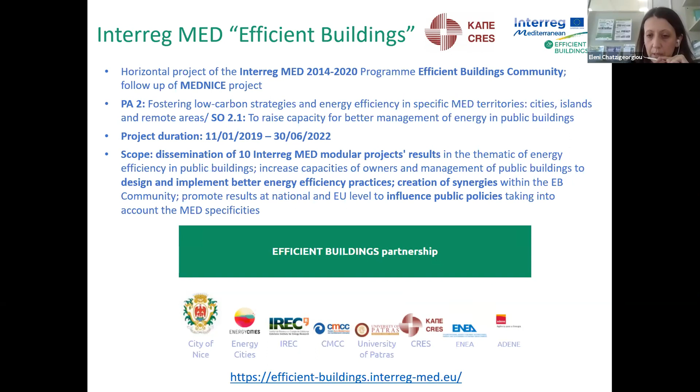This is the project website and the partnership. The partners participating are the City of Nice, Energy Cities, IREC, CMCC, the University of Patras from Greece, CRES, and ADENE. All this has as a background the wider EU objectives and requirements, which are becoming more demanding in terms of buildings renovation.

The EU Green Deal targets a renovation wave, which puts public buildings at the front of this initiative. They have a key role model to play for the public and the wider industry. The renovation wave builds on existing EU directive provisions, such as the EPBD and the EED, with the requirements of these directives in terms of increasing the energy efficiency of public buildings.

So the scope of the Efficient Buildings project is to accelerate the implementation of all these EU strategic targets.

So this is just a short introduction, and then I will move on to the first presentation of today's workshop, which is to do with a general presentation of the Impulse project. Sorry, let me just share the next presentation.

So the title of this presentation is Integrated Management Support System, a methodology for planning energy efficiency interventions in public buildings. I will give you a more general description of the project, and then my colleague Katerina will follow in the next presentation with a more detailed look at the tools that the project developed.

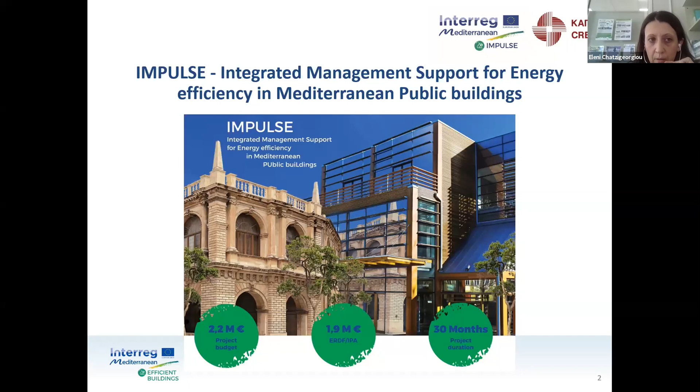The project drivers - I will not go into detail with the EU demanding requirements already mentioned, but just to emphasize that the main driver for the project was to address the requirement of an annual renovation rate of 3% of buildings with a floor area over 250 square meters, which are occupied and owned by central government. So there is a requirement for these buildings to be renovated each year.

But also the directive asks member states to encourage public bodies, including at regional and local level, to adopt an energy efficiency plan, either freestanding or as part of a wider environmental plan, containing specific energy saving objectives and actions for their public buildings, following the exemplary role of central government buildings.

So the overall target of the Impulse project, amongst other things, was to focus on these requirements and try to provide tools that can support public authorities at regional and local level to address these.

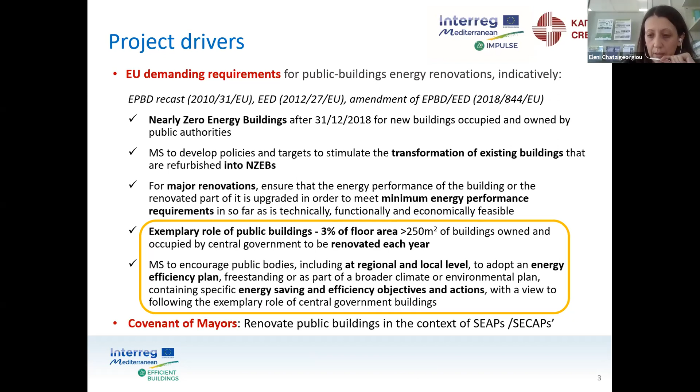Another driver, of course, was the Covenant of Mayors initiative, which is a voluntary initiative but a very large one, including thousands of municipalities from Europe and beyond, as part of which local authorities have to prepare sustainable energy action plans, SEAPs or SECAPs as they are now called, which include a section on public buildings.

And also one of the other drivers was the slow rate of public buildings energy renovation currently at local level, mainly due to a number of reasons.

The absence of technical energy data on the municipal building stock, the lack of specific methodologies to organize the information, the absence of reliable systems to map buildings' energy performance and to plan cost-effective technical and financial plans, the limited resources of public authorities for these actions, and the lack of funding to implement deep renovations means public authorities have to carefully plan gradual renovations of some buildings every year. So they need a decision support tool to help them select which buildings are priority for renovation or more cost-effective to renovate.

So the project involved 10 partners from 6 Mediterranean countries: Greece, Spain, France, Italy, Croatia, and Bosnia and Herzegovina, and 6 associated partners. CRES, as I said, was the lead partner of the project, and the project ended in July 2019. It was in the category pilot testing project of the MED modular projects, specific objective 2.1.

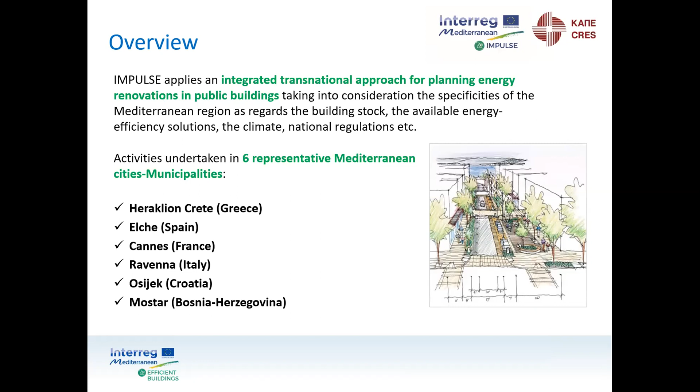Overall, Impulse applies an integrated transnational approach for planning energy renovations in public buildings, taking into account the specificities of the Mediterranean region as regards the building stock, the available energy efficiency solutions, the climate, national regulations, etc.

Actions took place in 6 representative Mediterranean cities, respective municipalities: Heraklion in Crete from Greece, the municipality of Elche from Spain, the city of Cannes in France, the municipality of Ravenna in Italy, the city of Osijek in Croatia, and the city of Mostar from Bosnia and Herzegovina.

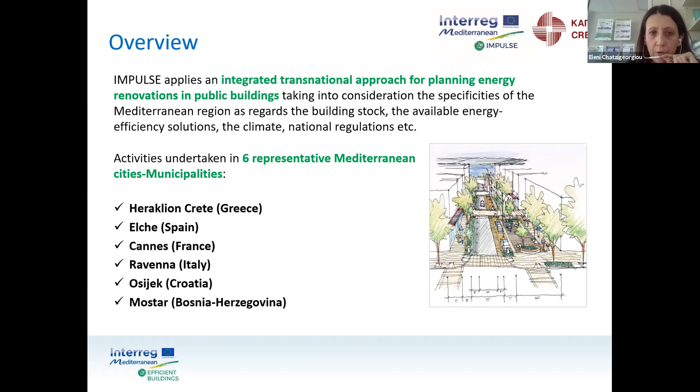The overall objective was to develop a system that can help public authorities plan reliable and affordable energy renovation projects for public buildings. There were some more specific objectives: to develop systems for the classification of public buildings in each pilot city into typologies, the assessment of renovation scenarios, and cost-optimal intervention, to develop renovation roadmaps and financial plans for gradual energy transition.

To develop a GIS-based information system with a mapping of the results for each typology in each pilot city, to use the Impulse tools to develop the relevant sections on public buildings within the SEAPs or SECAPs for the Covenant of Mayors, to undertake pilot small-scale renovation projects in the pilot cities, and most importantly, for these results to be transferred and replicated to other public authorities in the Med area.

This was done both during the duration of the project, with transferring and portability campaigns for this, but is also now the scope of the current Efficient Buildings project, and part of the reason for today's workshop. And ultimately, the uptake of the results in public policies at local and national level.

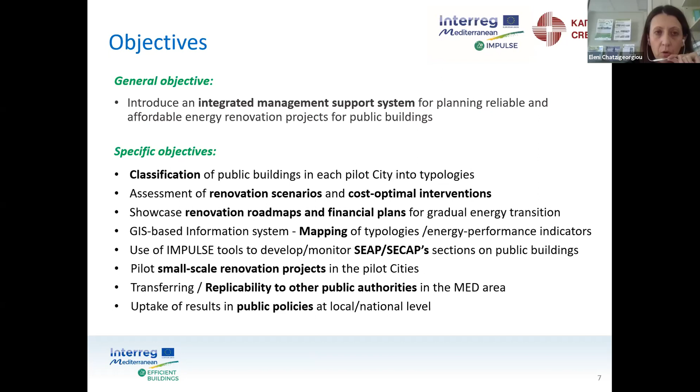So to show in a chart the overall Impulse approach, the first step towards planning energy renovations for public buildings includes a classification of the building stock using classification protocols. Then undertake energy analysis and simulation of the building typologies, again using various tools. And from this analysis result key performance indicators for the existing state and for various renovation scenarios.

At the intermediate stage, all of these results from the analysis were integrated into an Impulse GIS system for each pilot city. And at the final stage, some small-scale pilot renovation projects took place in the 6 territories.

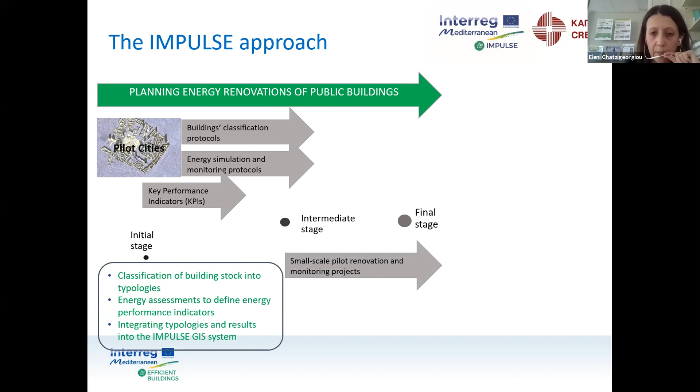In parallel, throughout the project, there were transferring and communication actions: videos that were developed, which are available on the project website, national networking forums of relevant stakeholders, technical and policy meetings, training seminars, and portability campaigns. In the next presentation that will follow, you will hear more about the various steps and the tools that this chart includes.

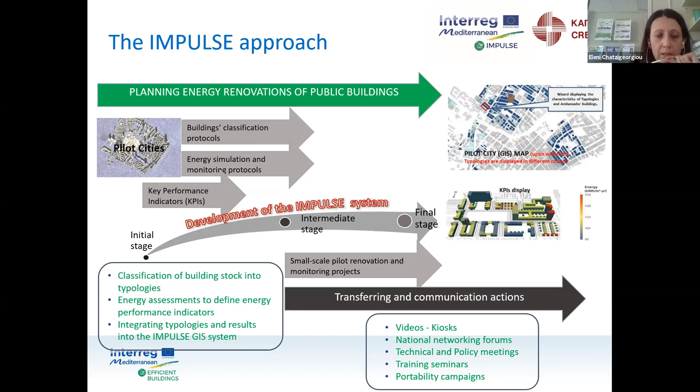So just to summarize the results we got from the project: overall, there were 6 libraries developed of public building typologies in the participating pilot cities, 1 integrated management support system integrated within a GIS map in each pilot city, including packages of cost-effective energy efficiency solutions replicable to other Med territories, 6 small-scale renovation projects in the participating cities, and 14 letters of intent from public authorities at national, regional, and local level to further exploit the project outcomes.

And also, we managed to achieve 50 completed SEAPs sections on public buildings in Med municipalities. Just to say some more things about the small-scale renovation projects, these were selected indicatively as 1 building in each pilot city.

There were buildings selected which were of high value for the citizens and the end users, and the selection was based on the results of the energy simulation analysis in terms of buildings that presented high energy saving potential with the least cost. So as the budget for implementing these actual renovations was relatively limited, we wanted these projects to have the most cost optimal result, and also a demonstrative character for the public and the users.

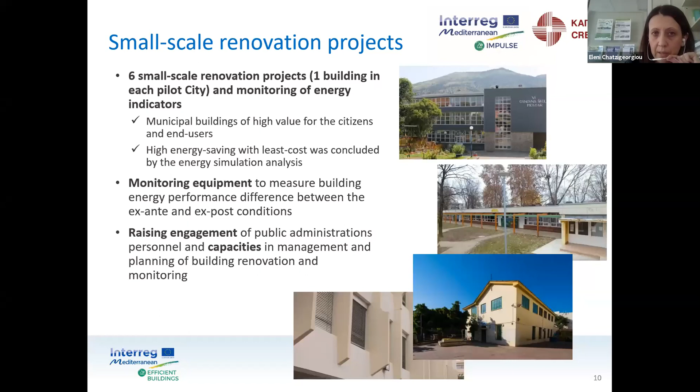Focus group meetings, national seminars took place, with the participation of political actors from each partner country, and the Covenant of Mayors involved stakeholders such as Covenant of Mayors coordinators in each territory, and also the respective mayors of the cities, with a view to eventually uptake the results of this project into political level for forming energy policies in the future at local level.

And as I mentioned, as a result of the project in the portability campaigns, 15 to 20 additional municipalities in each partner country were involved and experimented with the project outputs. So they used them to complete the relevant section of their SEAPs concerning public buildings.

So CRES, as a partner of this project of the Efficient Buildings Community, and with our role as a national energy agency promoting the energy efficiency of buildings, we invite all public authorities at national, MED, or EU level to exploit these tools that were developed by Impulse, which we hope could support you towards gradual energy renovation of the public building stock.

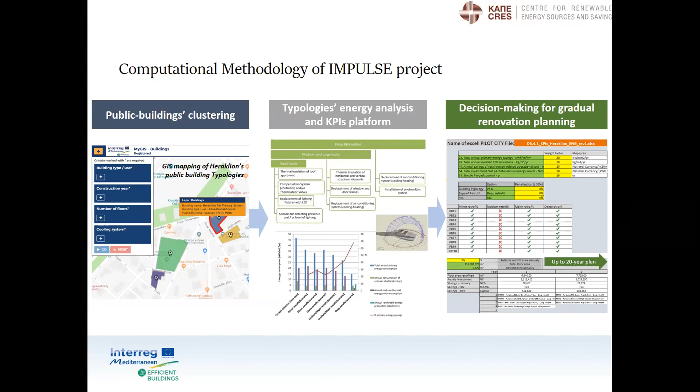So, regarding the first step of our methodology, for the 6 pilot cities, we collected all the necessary information for all the buildings of the public building stock. And we record all these data to an XLS file.

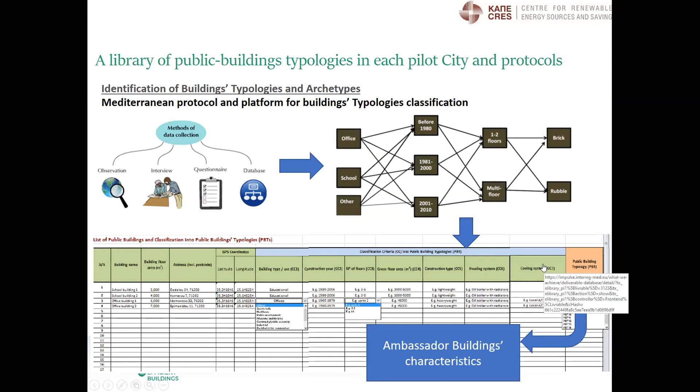As you can see in this slide, we had a lot of data regarding the building type, the construction year, the number of floors, the floor area, the construction type, as well as the heating and the cooling system. And in accordance with these criteria, we tried to categorize the buildings into typologies.

We have also available information concerning the energy performance certificate. We had building drawings, information concerning the construction elements and the building systems, the annual final energy consumption from solid fuels and electricity, and the total annual primary energy consumption. So the first step was to record all the available information concerning the building stock.

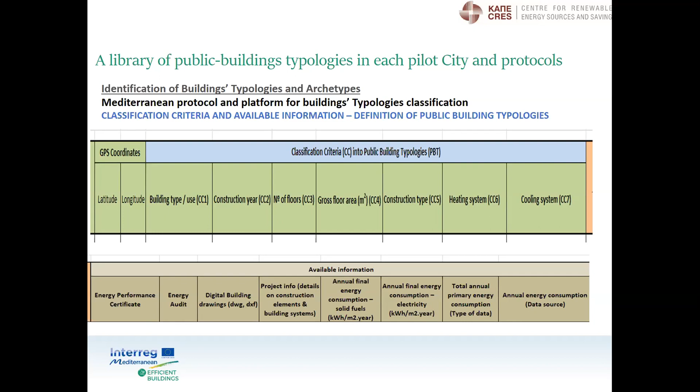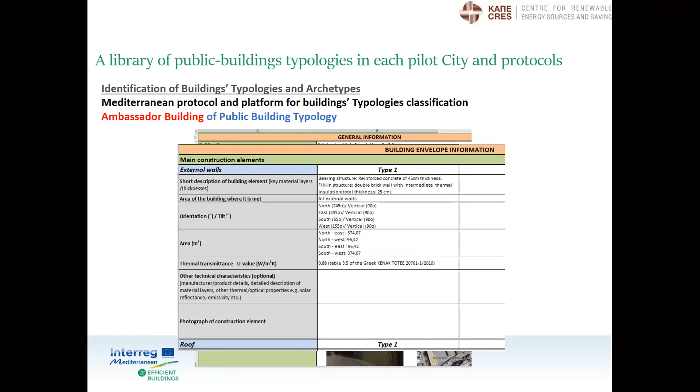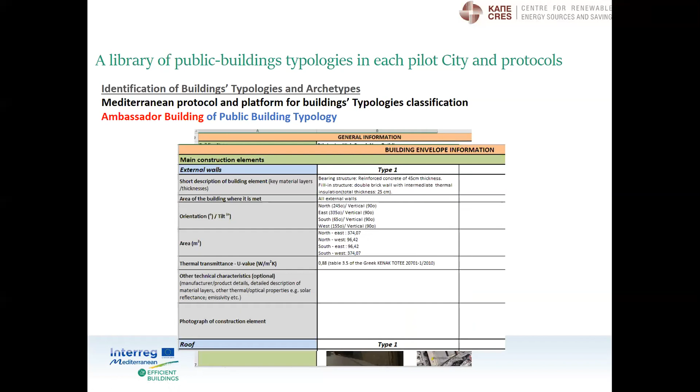And then for each one of the building typologies, we chose an ambassador building, a characteristic building from each typology. And for this ambassador building of public building typology, we record some general information concerning the type of building, the construction year, the number of floors, the number of occupants, some photographs, and then some data regarding building envelope, the orientation, the area of facades, the U values, and finally, some information concerning the building systems, the heating system and the cooling system. And these data were for all the ambassador buildings and for the 6 pilot cities.

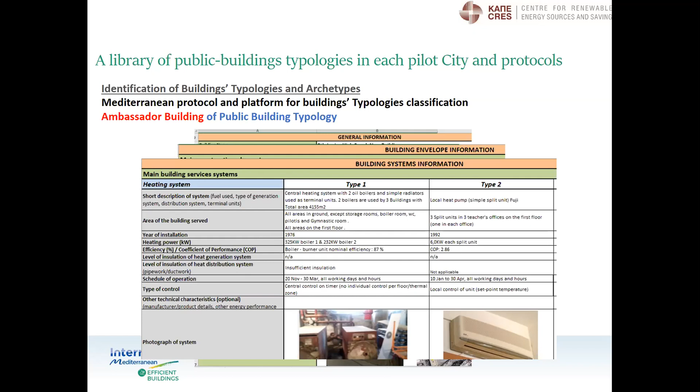The second step has to do with the energy analysis for ambassador buildings with energy simulations. And we decided to perform simulations for minor retrofit scenarios, medium retrofit, major retrofit, and deep renovation. Minor retrofit scenario means that we have interventions up to 35,000 euros and a reduction of energy performance indicators higher than 15%.

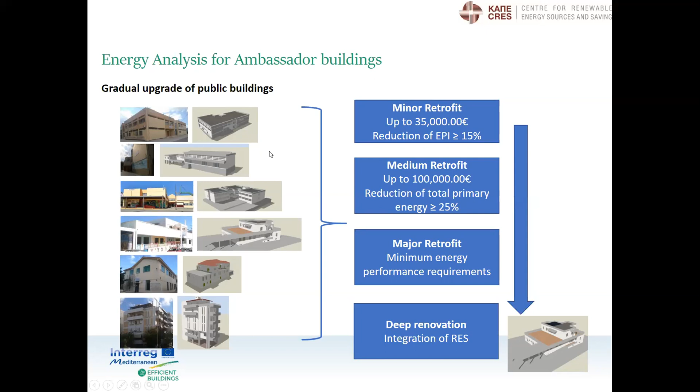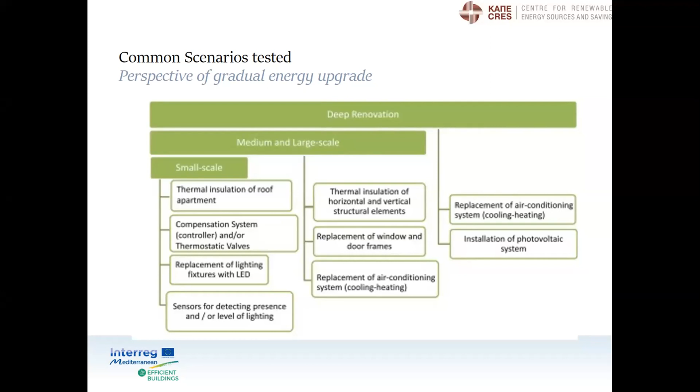In medium and large-scale scenarios, we have thermal insulation of horizontal and vertical structural elements, replacement of windows and door frames, and replacement of the air conditioning system. And finally, for deep renovation scenarios, we additionally have the installation of a photovoltaic system. So you can see in this slide that the scenarios have a perspective of gradual energy upgrade from one scenario to another.

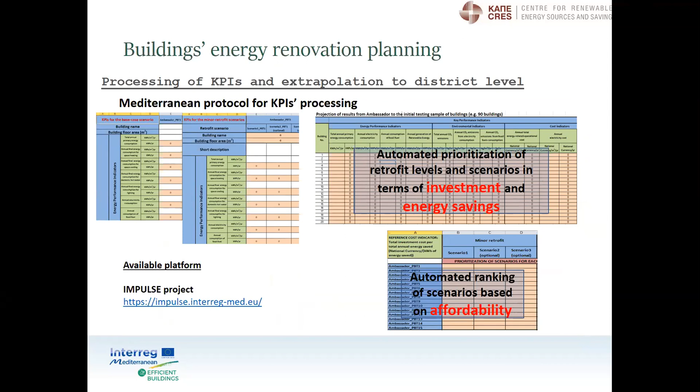In this second step of our methodology, we have the possibility to prioritize the retrofit levels and scenarios in terms of investment and energy savings.

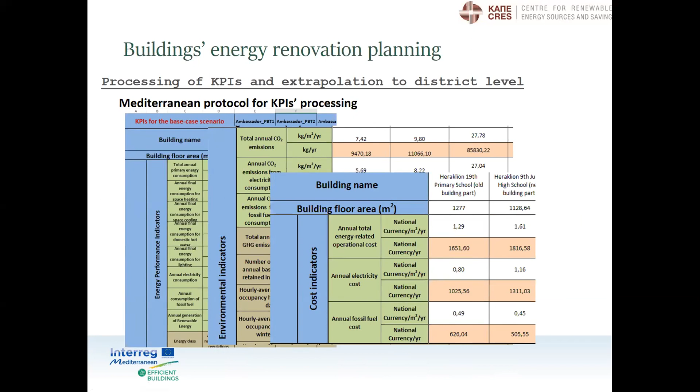For each ambassador building, we calculated the energy performance indicators like the total annual primary energy consumption, environmental indicators like the total annual CO2 emissions, and cost indicators such as the annual total energy-related operational cost and the annual electricity cost. We had this data for all ambassador buildings of each building category.

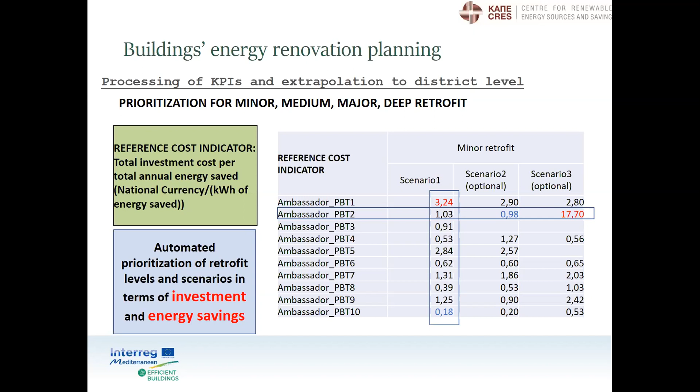We can also compare the values between ambassador buildings, so we will choose a building where the value of the reference cost indicator is quite low. For example, ambassador building 10 has the lowest reference cost indicator. This way, we have a prioritization of retrofit levels, and at the same time a prioritization of buildings in terms of investment and energy savings.

Another important thing is that we can have a projection for all buildings of our stock. That means that after the calculations for the ambassador buildings, we can project the results for all the buildings and have energy, environmental, and cost performance indicators for the whole building stock, for base case scenarios but also for energy renovation interventions.

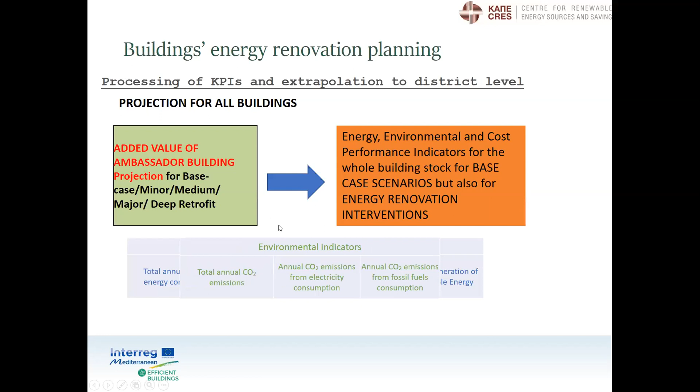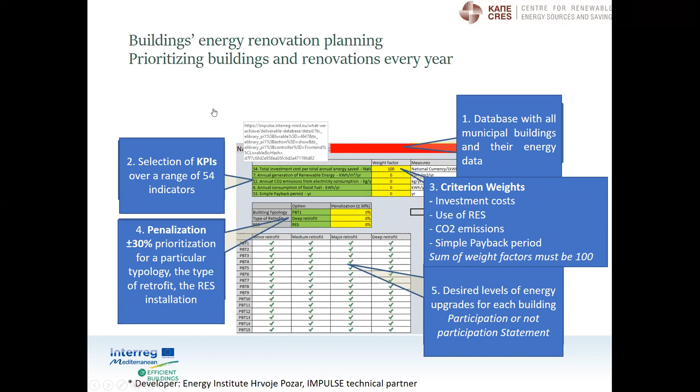From this tool, we have the desired levels of energy upgrades for each building. So we can have an energy renovation plan for the whole building stock of the pilot city.

The second step has to do with the energy analysis, using dynamic energy simulation tools, but this is not necessary. You can also use simplified tools, or use the data for energy from the energy certificates. So we can have an analysis of existing conditions and energy renovation scenarios.

With this second step, we have the opportunity to prioritize the typologies, prioritize the energy renovation scenarios, and estimate the total investment cost and total energy saving for renovating the entire building stock.

Finally, we have the third step, in which we can develop a long-term energy renovation plan of the public building stock based on selection parameters for the buildings to renovate each year.

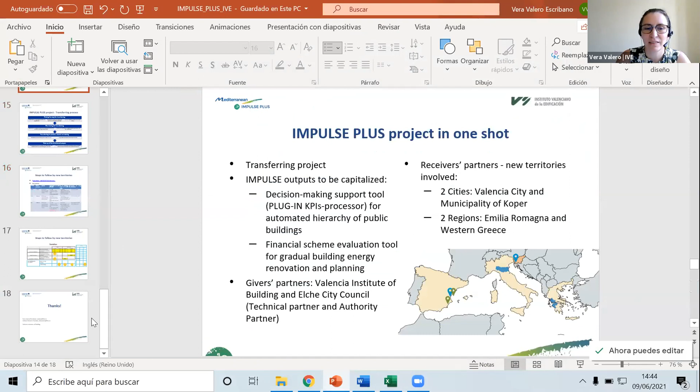We worked together with Elche municipality in Spain doing the Impulse project to develop the tools and the methodology that has been explained so far. Now we are leading Impulse Plus project, a capitalization project on some of the Impulse results and tools, that started in March. I'm going to start by telling you about our experience in Spain, the experience we followed with the Elche municipality.

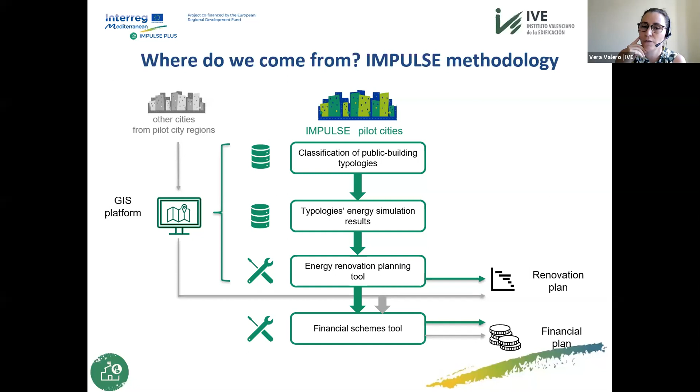And I'm going to briefly present the results of the Elche city. In the first step, when we performed the classification of the public building stock into typologies, we started from an initial sample of 85 public buildings. In the case of Elche, the selected criteria for the classification was the building use, the construction year, the number of floors, and the surface. Once we performed the classification into typologies, only 71 public buildings were classified into 12 typologies.

This is because 14 buildings were excluded from the classification because they were very singular buildings that we considered not replicable. Some were so singular in terms of the construction systems, or were the only one representative of their typology, that it made no sense to consider them into a typology. So when we performed the classification of Elche public buildings, we got 12 typologies.

7 of these typologies were for educational buildings, 2 for sociocultural centers, 1 typology represented office buildings, and 2 typologies represented sports centers. In terms of the number of buildings included in these typologies, 57 buildings were educational buildings, so 80% of the public building stock were educational buildings. And for example, there were only 2 office buildings included in one typology.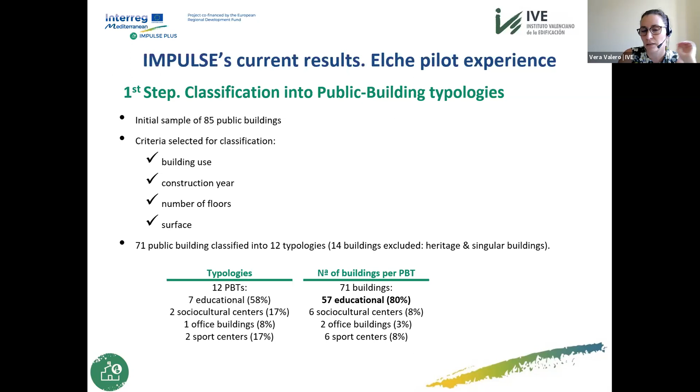This is because in the case of Elche, they have many office buildings that were not included - this is mainly because the Impulse methodology applies at building scale. We can't evaluate or include in this assessment spaces inside buildings. So in this case, many of Elche's offices were included in buildings on the ground or first floor, but they were not complete office buildings.

Regarding the second step, when we were speaking about the energy efficient measures that we get from the energy simulation results for the minor retrofit, mainly the energy efficient measures, we were speaking about the replacing of existing lighting by LEDs and the installation of solar collectors for domestic hot water. You can see there in the slide more or less the annual savings of primary energy we get and the simple payback periods.

In the case, for example, when we are speaking about minor retrofit levels and the installation of solar collectors, the simple payback period increases or reaches 20 years. This is because mainly we were referring to buildings with very low consumption of domestic hot water.

In the case of medium and major retrofit, we have that in half of the cases, the scenarios were common. I mean that when we were trying to reach the objectives established for a medium retrofit scenario, we were reaching the major retrofitting scenarios objectives. It was difficult to establish these 2 differentiated levels.

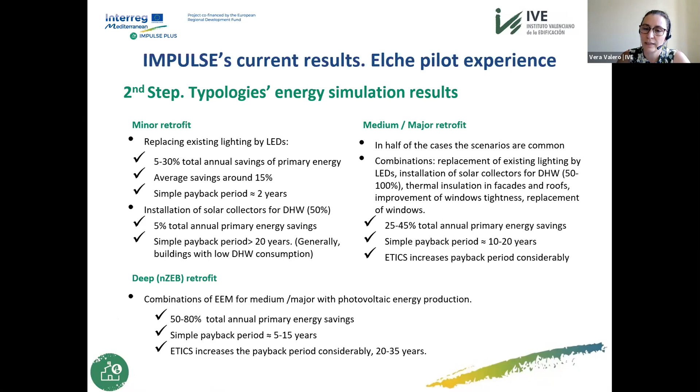And when we were going for deep retrofitting scenarios, the energy efficient measures that we were applying were the ones that we were applying for medium and major, but we included the photovoltaic energy production. Here you have some of the results we have for these scenarios for the ambassador buildings, but when we project this data to the whole initial sample of municipal buildings, these are the data that we get.

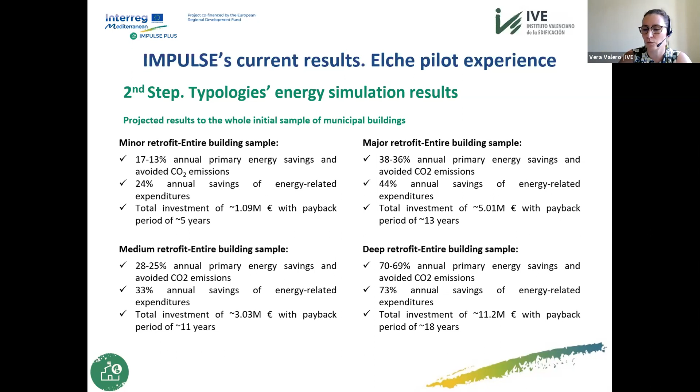I don't want to see them very detailed. I think it is important. This Excel file offers us the opportunity to evaluate or to assess the energy saving potential of our public building stock. So the amount of information we get from this tool is really important.

Here I'm going to go very fast through these slides; they are only some graphics that refer to the primary energy savings, some percentages that you can see depending on the retrofitting scenarios that we are considering, but also depending on the use of the building. This is the same graphics, but we are speaking about the avoided CO2 emissions.

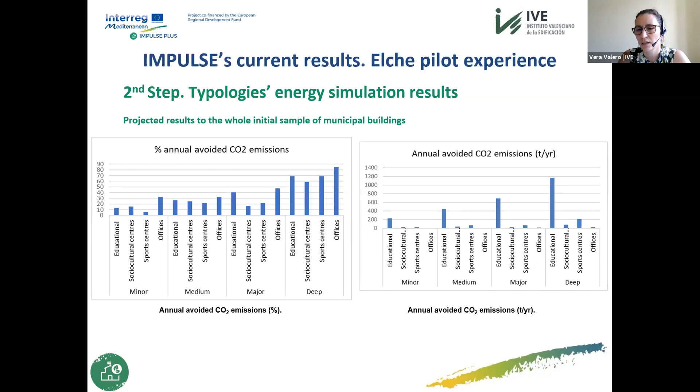In the image in the left part of the slide, you can see the average percentage of CO2 emissions avoided by scenario and by use. But in the other part, you have the data for all the stock. This is because, as you can see, as the Elche municipality has many buildings for educational use, this increases a lot.

And regarding the third step, that is the energy renovation planning tool, the Elche municipality joined the Covenant of Mayors, and at the moment of the Impulse Plus project, they were revising their sustainable energy action plan, and they were trying to define their sustainable energy and climate action plan.

So the objectives they wanted to comply with when we were using the energy renovation planning tool were to reduce CO2 emissions by 40% by 2030, to increase the energy efficiency by 27%, and to increase the use of energy from renewable resources by 27%. There was also a political will at this moment to improve educational centers and to encourage the generation of renewable energies. So at this point, we start working with the energy renovation planning tool.

We start in an iterative process, so we have to define the input data that Caterina has explained before, and we have to check that the results that we got from the tool comply with the objectives that the municipality of Elche have in mind, because they consider that the 3% of surface to be renovated yearly was important, but at this moment they were defining the sustainable energy and climate action plan, and they were trying to use it for this purpose.

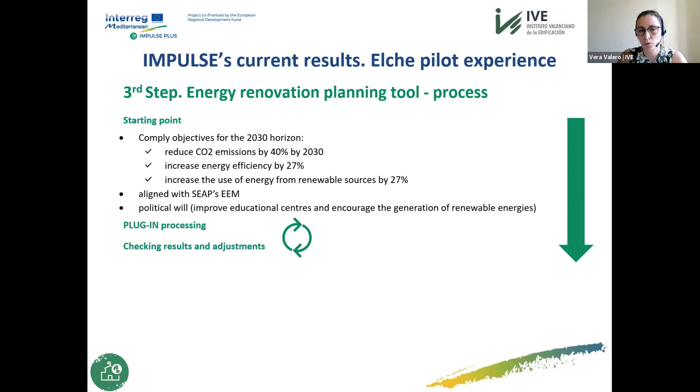So at the end, they decided that they were going also to use one key performance indicator to govern the design of their energy renovation plan. That was the total investment cost per total annual energy saved, as they considered this indicator was the most efficient way to invest their public money. They also positively penalized the public building typology number 1.

That was one of the typologies representing educational centers, and also penalized positively, they consider very important, the renewable energy systems. They work with all scenarios and all the public building typologies, and they start working with 3% of surface to be renovated yearly, but with this percentage, they didn't meet initially the objectives that they wanted regarding the emissions, and so at the end they increased this surface until 7%.

So with this, introducing this data in the energy renovation planning tool, they get a yearly renovation plan for 14 years. They achieve the energy and CO2 emission savings objectives for 2030, and the bad point, the only thing that we have to highlight here, is that as this tool works automatically, there was an imbalance in terms of yearly investment required and the number of projects.

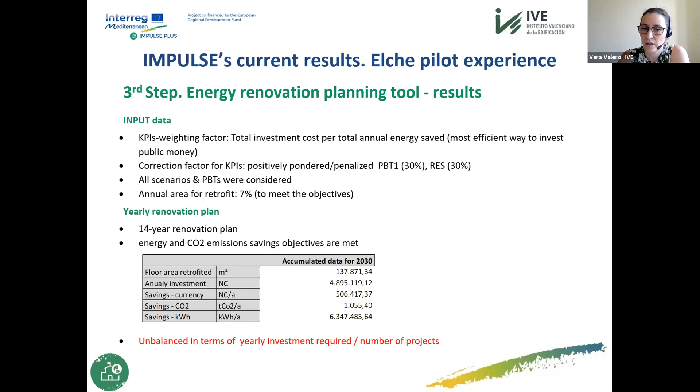And the final tool that we haven't seen here is the financial scheme assessment. This tool assesses the two ways of financing the renovation plan that we get from the energy renovation plan, and these are the results we got from many simulations. We tested the tool with many data, and these are the results they got.

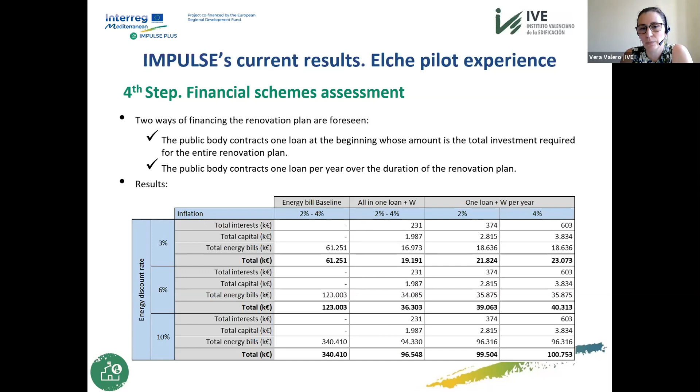I'm going to explain very briefly now what is the objective of Impulse Plus project and the future developments that we foresee in the project. The project is a transferring project of the MED program. The objective is to capitalize or to transfer to other new territories some of the results and the outputs that we get in the Impulse project.

These outputs are the decision-making support tool, the plugin processor, KPIs processor for the automated hierarchy of public buildings, and the financial scheme evaluation tool for gradual building energy renovation planning. There are 6 active partners in this project. 2 partners have the role of giver partners, that are Valencia Institute of Building and Elche City Council.

We have complementary roles as a technical partner and authority partner in Impulse Plus project, and we have involved 4 new receiver partners, new territories in this project that are going to use and implement the Impulse methodology and tools. We have 2 cities, the Valencia City and the municipality of Koper. The Valencia City is a big city if we compare it with the cities involved in the previous Impulse project.

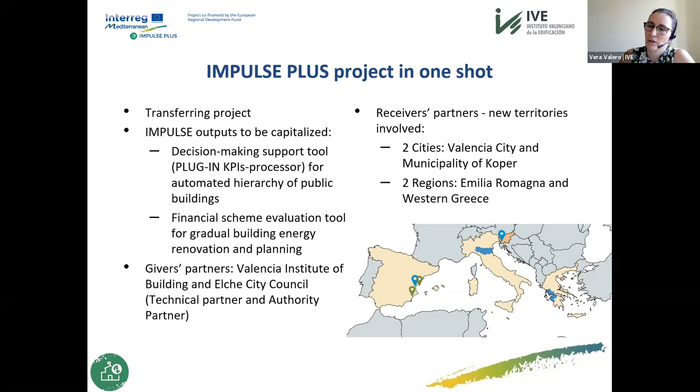We recently developed an international webinar to introduce receiver territories to the Impulse philosophy and tools. And now we are working on a needs assessment survey with which we will try to identify what are the needs of receiver partners regarding the tools that we are going to work with.

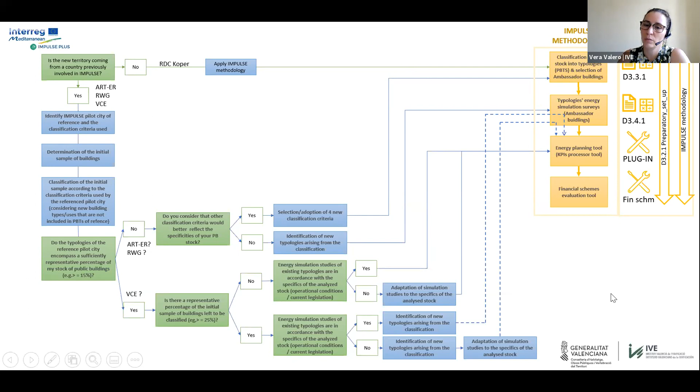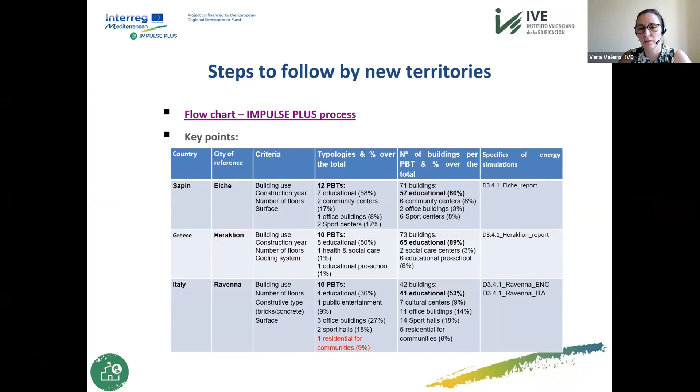So as you can see here, this chart can help you to know where you are, or where your municipality could be, what steps you will need to follow, and what tools or templates will be interesting to use. So here we have the key information that the new territories are going to use to start building their public building stock libraries. And this is just an example we show them.

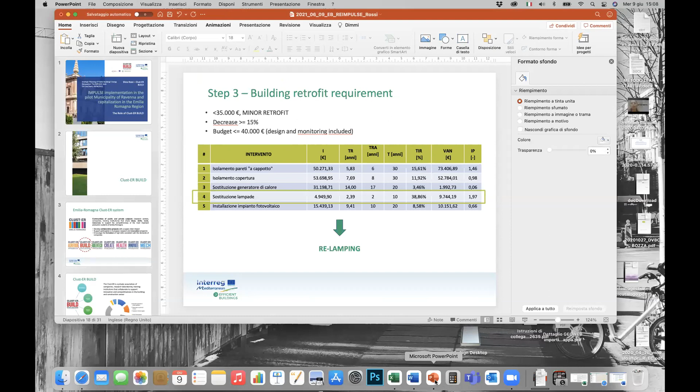I'll just introduce myself with a few words. I'm Silvia Rossi from Clust-ER BUILD and Emilia-Romagna region. A few words regarding Clust-ER BUILD, because maybe it's not so well known as an association in the European ecosystem.

Clust-ER BUILD is one of the 7 clusters of Emilia-Romagna region. Here in our region, we have these kinds of communities of public and private subjects that can share ideas, skills, and tools to support the competitiveness of the Emilia-Romagna region business and enterprise. We are a private association. Our members come from enterprises, both SMEs and big enterprises, research laboratories, public entities such as universities and research labs, and training institutions.

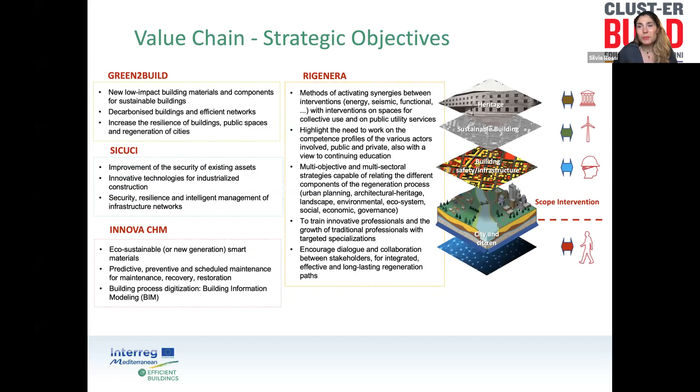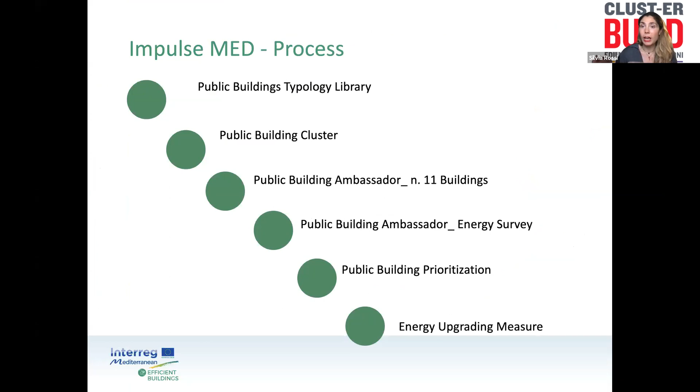We are also an associated partner of Impulse Plus, because in the past I worked for Ravenna municipality and coordinated the Ravenna Impulse Med project. We work on the process that Vera already described very well for Impulse Med. So I'll go on and focus on what we have done in Ravenna municipality, and what the Impulse project has done for the municipality, because it was really a big support for policymakers and for decisions regarding the retrofitting plan.

We base our energy survey on different regulations. First of all, for the energy dynamic survey, we based it on the technical regulation for the calculation method for heating, cooling, and domestic hot water.

Then we worked on the classification. In Ravenna, we decided to use 4 criteria. The first one was the building type use, which was compulsory for all partners of Impulse Med. Then we decided to use construction year, but in this case using only 2 ranges.

I wanted to highlight this point because later you will see the difference with Impulse Plus for Emilia-Romagna region as a partner of the capitalized Impulse Plus. In this case, for Ravenna, we decided on 2 different ranges: the first for very old buildings, and the second for buildings constructed after 1976, because in Italy 1976 was the year of the first law for energy retrofit. So everything changed after that year here in Italy.

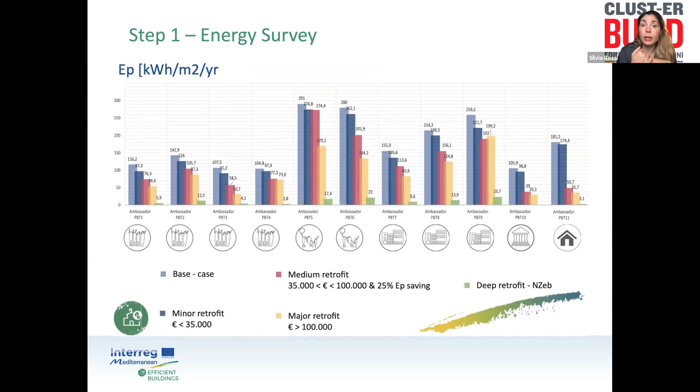Here's an overview of our energy survey. As you can see, these are the results of the energy diagnosis for the public building ambassadors, divided into the different typologies. You can also see the comparison between the base case in light blue, and then minor retrofit, major retrofit, and deep retrofit. I want to underline that with the minor retrofit, in Ravenna municipality we can really achieve good results for our buildings.

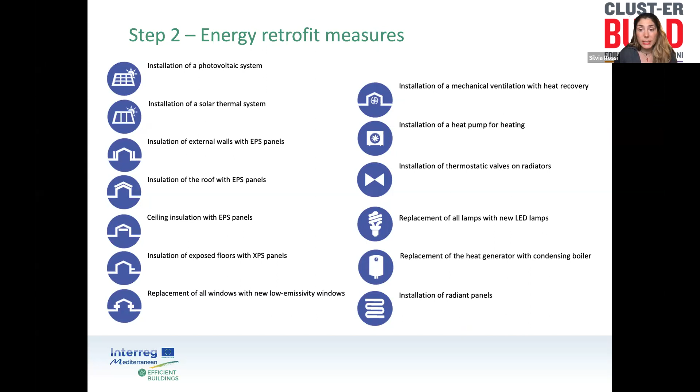So, what we have done in Ravenna municipality is work on a schedule of interventions per each public building typology ambassador, and we share this schedule with our policymakers. Here you can see two examples.

The first is the primary school Lovatelli, which is the ambassador of the first class of our typology. And the second schedule is of the Randi primary and secondary school. You can see the different scenarios that we calculated and analyzed for each kind of retrofit.

One of the problems was that, for example, for the Lovatelli primary school, the first scenario was with photovoltaic panels, and in this case it's not really adherent to the hierarchy of retrofitting measures, because we prefer to work first on the envelope, then on the heating or cooling system, and then on the renewable energy system. So we decided to work with scenario number 2 instead.

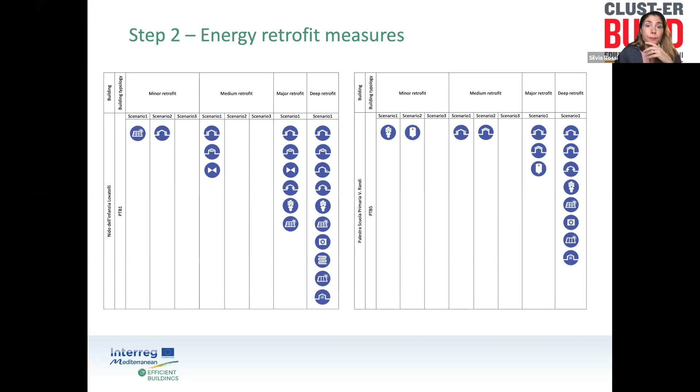As Vera and Caterina already told you, we could choose between 50 key performance indicators. In our case, in Ravenna, we chose...

First of all, primary energy consumption for our retrofitting plan, and also the CO2 avoided, because we decided to implement our action plan.

For sustainable energy. Moreover, because we have to convince our policymakers, we also worked on economical key performance indicators, such as annual energy saving cost, or the index of profitability, or net value.

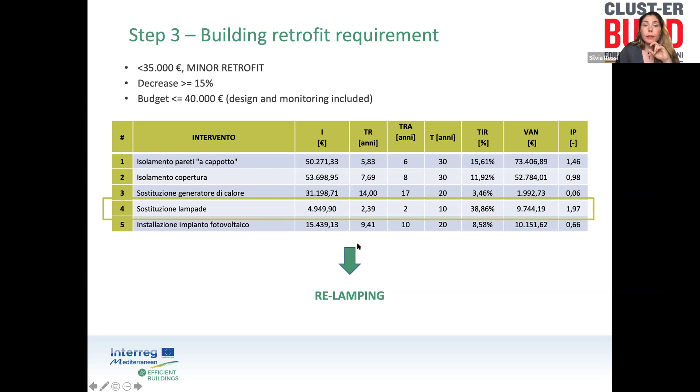So in this case, in Ravenna, we decided to work on two different pilot buildings, both gyms of a primary and secondary school.

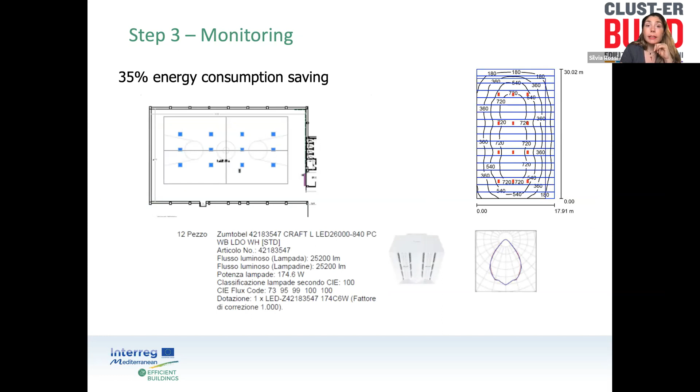Here you can see our analysis of the gym and also the type of lamp we used for the retrofit. We also monitored consumption, and we noticed that the relamping effectively worked for our school.

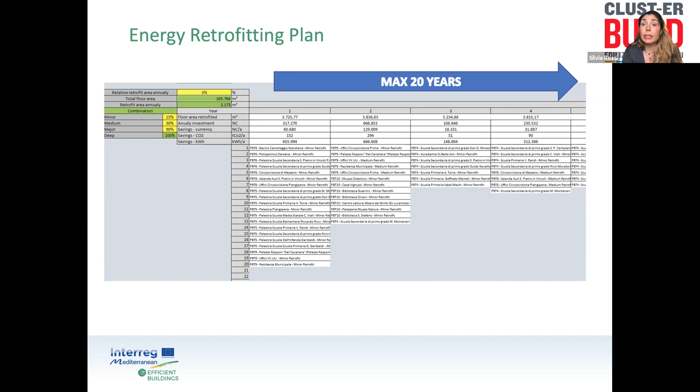Here you can see an example, just a screenshot of what we did with the Impulse tool. That was very important for us because we could integrate the Impulse tool and its GIS platform into our Ravenna municipality GIS.

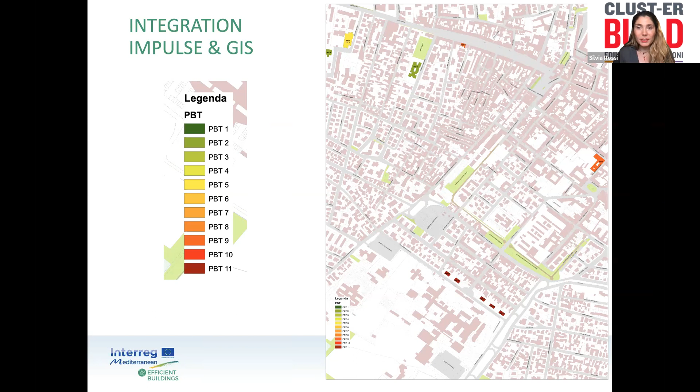And this is our integration with the action plan, because the Impulse platform allowed Ravenna municipality to implement our energy action plan, not only the SECAP or PAESC, as you want to call it...

But the Impulse tool also supported the technicians from Ravenna municipality in achieving other financial, co-financial - how can I say - financial support from the region.

In this case, we participated in the ROP ERDF co-finance with the Montanari school. So the relamping is the pilot case of the Impulse Med project.

But thanks to the Impulse tool, we noticed that Montanari school was a great example for energy retrofitting, and we decided to present the big retrofitting project of Montanari school to our region.

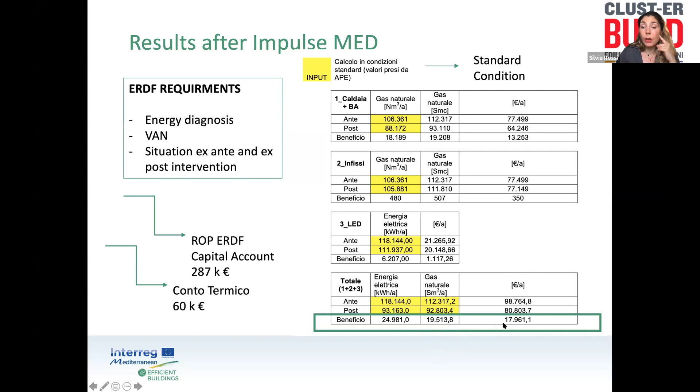Regarding electrical energy, more or less 25,000 kWh per year as a benefit, and also for natural gas almost 20,000 standard cubic metres. So if we compare the euros per year, we have a benefit of almost 18,000 euros.

So in this case, the Impulse tool was very, very important for Ravenna municipality. But now, as coordinator manager of the regional cluster 'Build,' we are an associated partner of Impulse Plus Med.

Because we have a very big network, and we can work with other municipalities, because as I told you at the beginning of my presentation, we have a strong relationship with other municipalities, with enterprises, and with technicians in general.

So we can support Impulse Plus with our network, and also our competence in energy consumption and sustainability of the energy planning. And Emilia-Romagna have 6,000 social housing buildings, and regarding Emilia-Romagna region, both Cluster Build and Arte would like to focus on social housing buildings, because we have a very big problem with this kind of typology of public building.

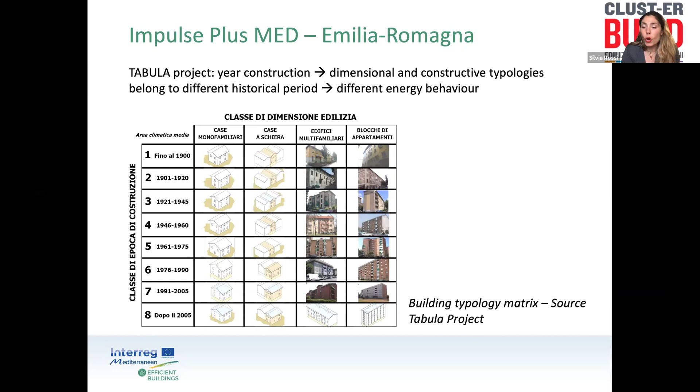So we would like to implement the classification criteria for the social building, and we would like to work on the year of construction that can affect the dimensional and constructive typologies, because the different dimensional and constructive typologies belong to different historical periods, so can affect the energy behavior of the building stock. This is why we want to work on this kind of classification criteria.

Moreover, Clust-ER Build is working with the smart community of social housing, such as ACER, that is the Association of Social Housing in Emilia-Romagna region. And we already work with the community for new services, and we already study the impact, such as urban regeneration, economical impact, social impact, and environmental impact.

This is why ART-ER chose Clust-ER Build as associated partner, because we can easily disseminate the results. We can easily support ART-ER and Emilia-Romagna region in transferring all the results from Impulse Plus Med.

So, well, I finish, and maybe I went very quickly, but I'm here available for your questions.